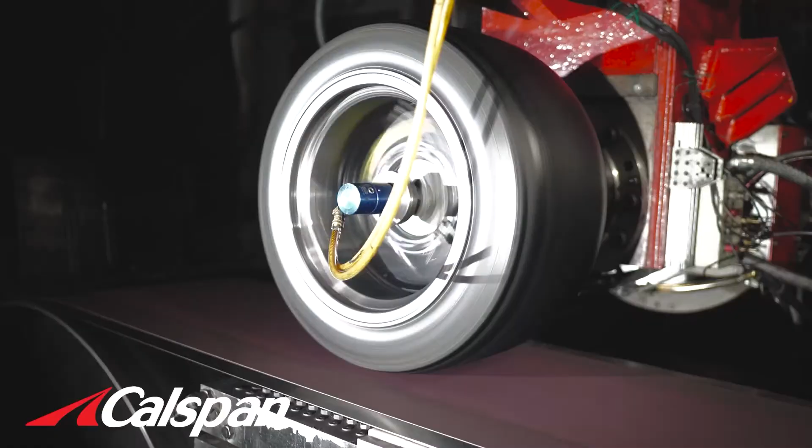So, our agenda for this talk is, first of all, an introduction of me, my background, and some of the areas I've worked in both engineering and the virtual world. Definition on how the virtual world has changed over the years. Virtual world in motorsports, a little bit about my beginning there, specifically in motorsports.

A little bit of a case study that we wanted to give to you today regarding the growth of engineering in NASCAR, how we went from no engineering in place to where we are today with the pretty firm use of the virtual world. The importance of virtual world in motorsports. Why is it so important to engineering? Why does it mean so much to the engineers in motorsports?

The advent of the simulator and the virtual world in motorsports. Again, the newest technology, and how are we applying it? Why is it important? And then finally, the future of the virtual world in motorsports, and then some closing remarks and some credits.

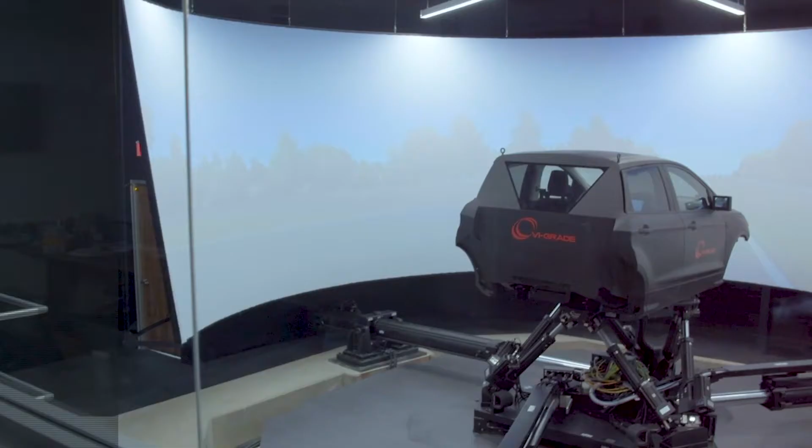So over the course of my career, I've had the fortune to develop and deploy various forms of engineering tools, simulation methods, and virtual environments, and have witnessed tremendous change over those years. Seems like whatever position I held, my focus was always on the use of computers and the virtual world to solve real-world tire vehicle system problems and to advance the role of the engineering process.

Whether it was in supporting tire designers in my early years, creating custom tire vehicle simulation software, or developing tools and methods in support of either OEM or motorsports programs, I was fortunate to witness and participate in the growth of the role of engineering and the virtual world.

While all these programs have been exciting and challenging, there's been none more fulfilling to me than all of the work in motorsports. I had the pleasure of working with an extremely talented group of engineers that were focused on making significant contributions to the success of their race teams, as well as the art of engineering in this extremely stressful and fast-paced environment. At its core, this motorsports engineering problem is the quintessential engineering problem.

It might surprise you to hear me say that after all those years of motorsports, after all those years of enjoying what I was doing, there were times where I felt like engineer was a swear word. Let me explain what I mean.

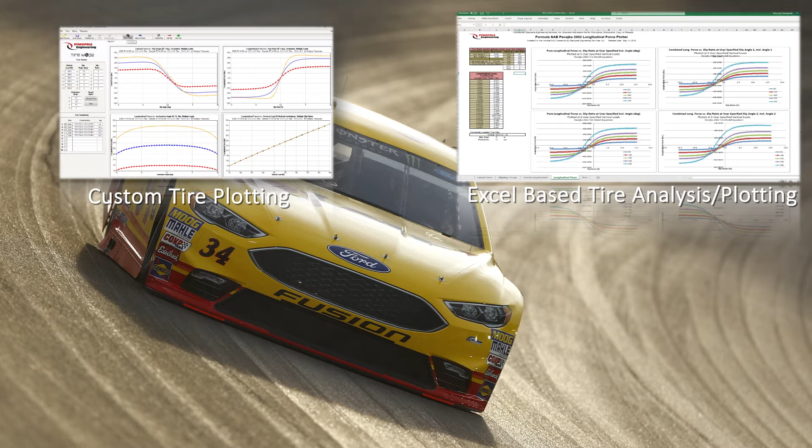While these were crude compared to today's standards, they were invaluable back then because they gave engineers access to information and analysis methods they didn't have prior to that. These tools included MATLAB and Excel-based tire data analysis and plotting programs, simple kinematics processes, basic steady-state vehicle dynamics calculations. At the time, these tools and methods gave engineers access to information not available before and gave them the ability to start formulating a base understanding of tire and vehicle performance. It's also allowed them to start investigating a lot of the what-ifs that engineers are known to ask.

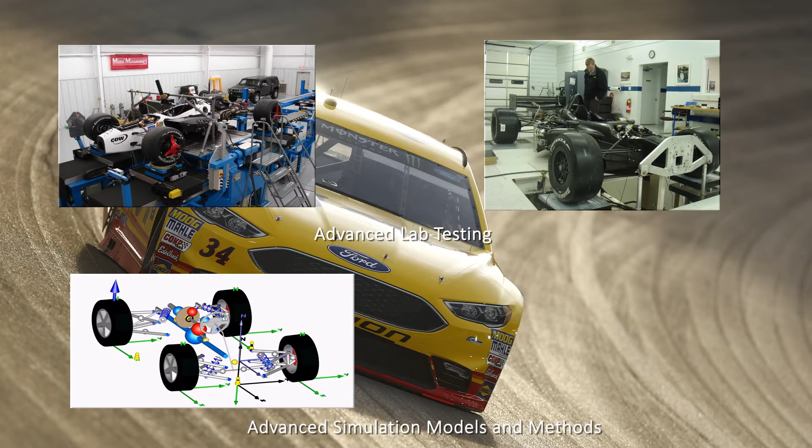As time progressed, in typical engineering fashion, we started asking more questions, demanding more detailed data, started developing more detailed processes and created more advanced models and tried to deploy more useful tools. The status quo was never good enough, especially in racing. Because of this drive, focus shifted from simple analysis methods and lab testing to advanced analysis and engineering tools, advanced lab tests, dynamic simulation methods, and eventually to the virtual environment we're all familiar with today, namely the driver-in-the-loop simulator. I will be discussing most of these forms of the virtual world as part of this talk today.

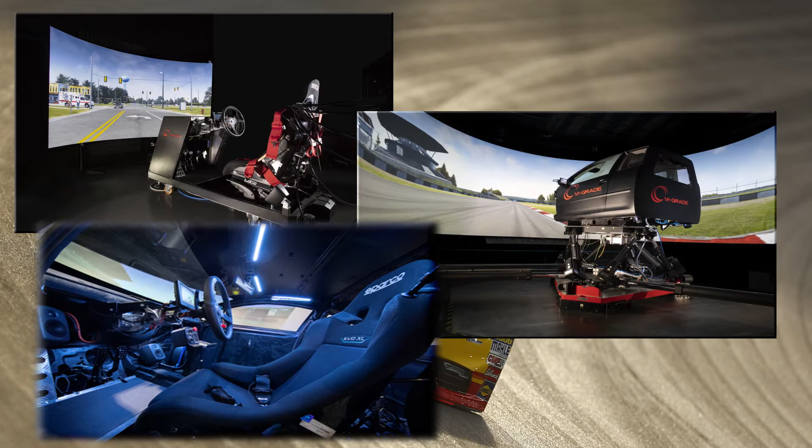So with this variable definition of the virtual world in mind, I want to take some time to circle back to my time in the advanced engineering group at Goodyear Racing in the mid-1990s. During that time, Goodyear was heavily involved in Formula One, and I was tasked with developing the tire models and the simulation methods necessary to support not only the team requests for information, but also the race tire design process.

And while engineers and the engineering methods were a norm within the Formula One ranks, they had built up large organizations that seemingly had limitless budgets. That level of detail and that level of capability and resources were not yet available in the tire manufacturing world. So while race teams pushed us for all of this information relevant to the tires, we were only in the early stages of developing the testing methods and the simulation methods required to support not only their requests, but also the tire designer's requests and the tire design process.

As I noted, my initial charter was to take a lot of the OEM tools we had developed and port them over into the race tire development process, and to try and come up with engineering metrics that would help our race tire designers and their process, as well as help us all understand the interaction of the vehicle on tire performance. We wanted to find ways not only to understand the operating conditions that the tires saw, but also find ways to try and incorporate or understand the driver comments and driver feedback and try and equate them back to some calculable vehicle dynamics metric.

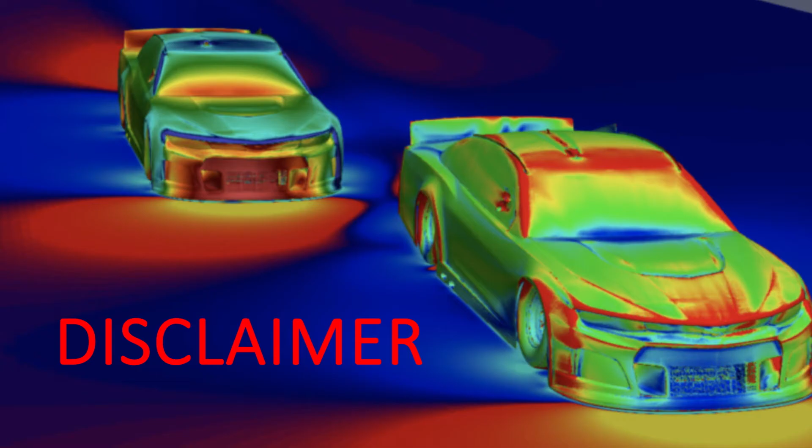Let me expand upon that and provide some background. Before we go further, I want to emphasize that this is in no way, shape, or form a critique of NASCAR or anybody involved in the sport. It's merely being used as an example. Note that all forms of motorsports have been through this exact same evolution over time—some just got started a little earlier.

As I stated before, I started my career in NASCAR in the mid-1990s, and I put together this engineering and virtual world time continuum for NASCAR to illustrate the typical growth path from a world of no engineering to a world of full use of engineering, simulation technology, and the virtual world.

So the first block of time I want to talk about is the early 1980s through about 1990. During this period, there was no engineering at all as part of the process, and there were no tools available, whether physical or virtual, to support chassis development or race weekend preparation and setup optimization.

Most decisions were made by an extremely talented, experience-based crew chief who had amassed a collection of notebooks of data and real-world test and race information about the car. These books and data were used not only to prep the car for the race weekend, but also to adjust the car during the race weekend. These crew chiefs essentially had 100% control over how the car was built, assembled, and raced.

At this point in the NASCAR timeline, a great number of suspension parts being utilized were still production OEM parts that were being 'adapted' for use in racing. But these guys were really good at what they did. They knew their car, they knew how to adjust it, they knew how to interpret driver comments, they could take visual cues from the car on the racetrack, they would look at lap times and make adjustments just based on their experience and the data books available to them.

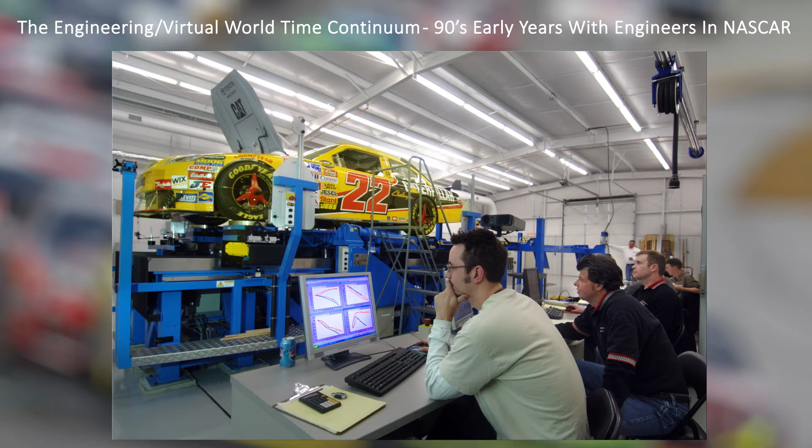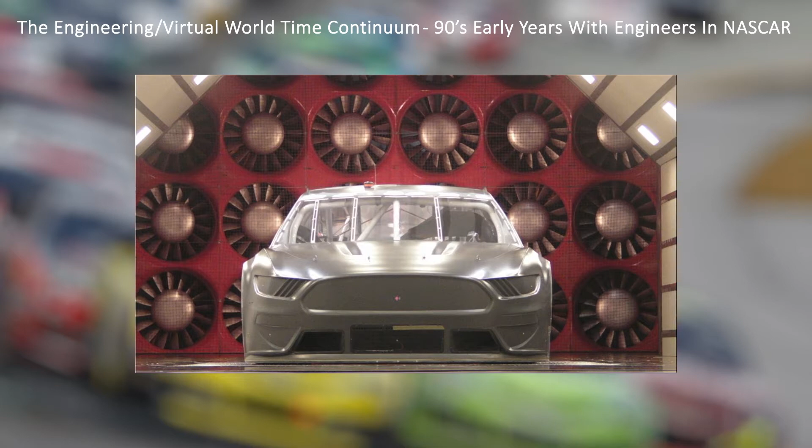So during this time, the easiest inroad for technology and for the engineers in NASCAR was the application and understanding of aerodynamics information through the use of wind tunnels. This tool offered a bit of instant gratification for the traditional decision makers, where application of concept designs as well as the QA process were easily measured, quantifiable, and able to be validated at the racetrack.

At this point in time, there was very little known about tires other than the experience-based knowledge teams had amassed through the years. One of the first impacts we seem to have had on the sport was when we started to provide some pretty basic tire information to the teams via Excel spreadsheets with general plot creation capabilities. By providing that to the teams, we were able to leverage some vehicle information back from them as we started to develop our internal process.

NASCAR is a place where the great equalizer is the fact that everyone has to run the exact same four tires. The teams making the best use of information about those tires to improve speed and manage degradation through a race were typically the ones who were successful. So having knowledge at whatever level was seen as a large advantage.

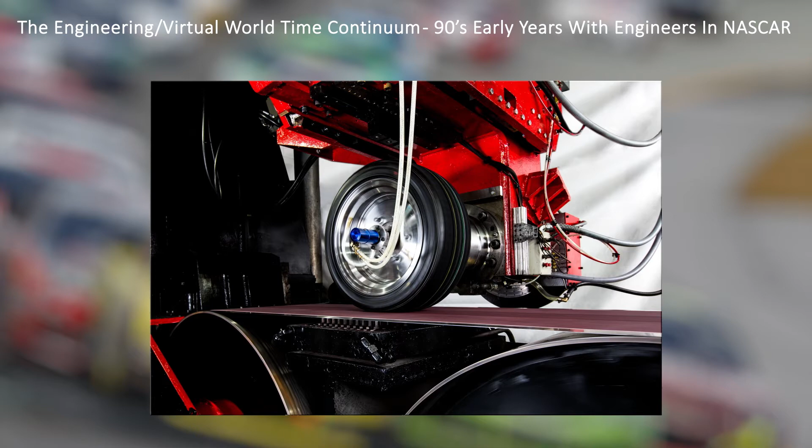In terms of tire information, teams really only wanted to know about optimum pressure, and every once in a while wanted to know about the optimum toe and camber settings, or the preferred alignment for the tires in service. Now that tire data was starting to become more readily available, teams started to focus their efforts on the operating environment of the car and the tires on the racetrack, trying to make better use of the tire data being provided to them.

At this time, tire models were being developed to support tire data analysis methods, not really for any kind of simulation analysis. Engineers merely wanted to know what the best hot and cold pressure was, what the best inclination angle was, and what kind of toe they needed to run in order to make best use of the tires and develop their optimal performance during the race.

Note that the more data we provided, the more questions they asked, the more detailed information they wanted, and this would go on. This was really the prime motivator for me to start Stackpole Engineering Services, to support this growing interest in tires, tire modeling, and tire data.

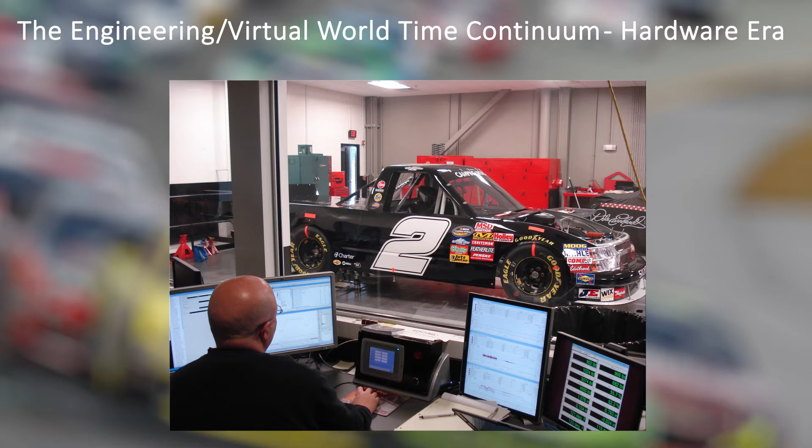So now we're in the era of 2000 to 2007, which I've titled the era of the hardware solution. This was the beginning of more comprehensive lab-based tests, such as pull-down rigs, 4 and 7 post, and now 8 post rigs, and the expansion of infrastructure required to support this lab-based testing. These rigs were being installed at team facilities or OEM centers to support a better understanding of the race car and the ability to evaluate prototype parts and vehicle setups.

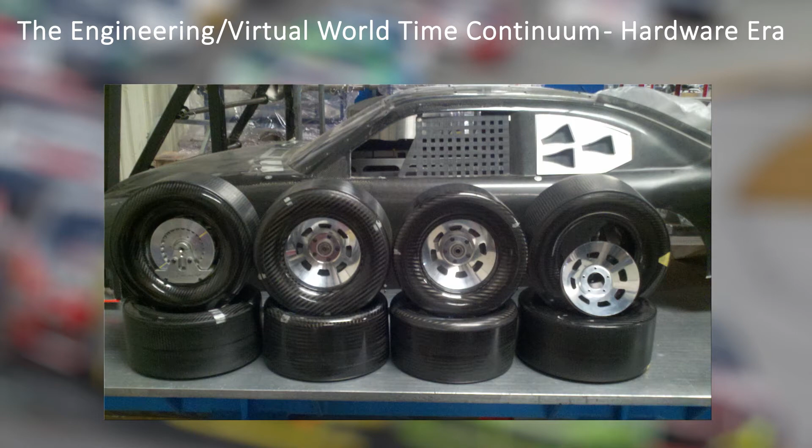As is typical in my experience, engineers developed some pretty specific techniques to extract the most out of this testing data. This also allowed engineers to investigate designs and setup changes on the race car without ever having to go to the racetrack. While this was a very effective method to understand their race cars, the process typically required physical cars, physical parts needed to be manufactured, and very lengthy test sessions—in fact, a lot of times lasting for days, sometimes with varying results.

While this testing allowed engineers to evaluate changes, they didn't always equate to improvements on the racetrack, and didn't always equate to changes the driver would even notice. Regardless, teams and manufacturers continued to press forward, gaining experience with the testing methodologies and working towards making these methods part of their mainstream design and optimization process.

At this point, engineers and crew chiefs within NASCAR started to develop a better understanding amongst themselves of the why and the how behind how these cars worked. But this is just now another collection of information within this silo of technical data. So now they're going to the racetrack with briefcases that not only contain the historical data they'd previously amassed over the years, but now technical information such as wind tunnel data, gear ratio charts, engine dynamometer data, vehicle performance data, kinematics curves, shock dynamometer data, and the list goes on. And all this data had to now be stitched together basically with experience and intuition.

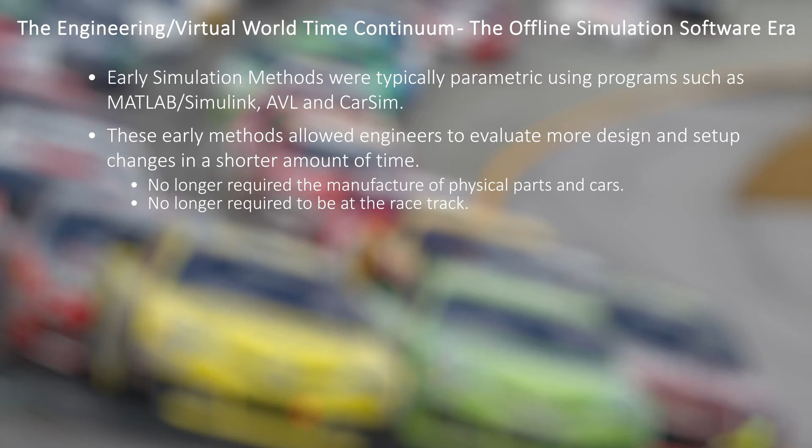Engineers being engineers, they're always searching for a better, more accurate way to evaluate performance using these virtual methods, always searching for better models and better methods to represent the performance of their race car at the racetrack. We then started to get into dynamic simulation methods, either parametric or multi-body physics based. They were kind of the next step forward, both for handling and for ride performance. We used tools such as CarSim, Adams, and more recently, Dymola.

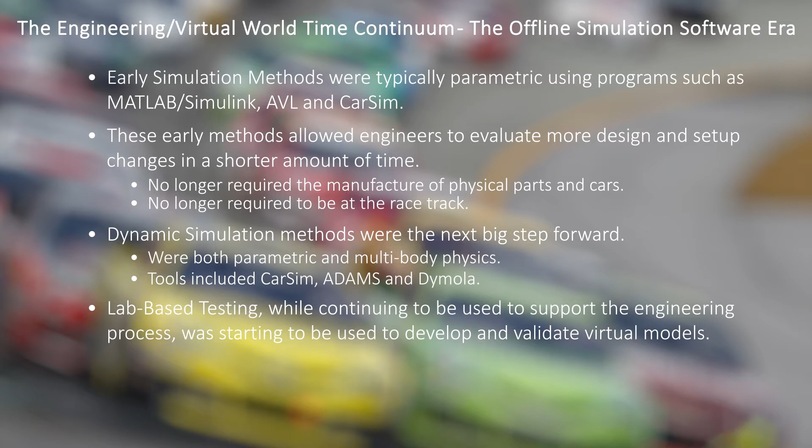These lab-based tests, while continuing to be used to support the engineering design process, were starting to be used now to help develop and validate the models we were building. These methods and lab-based tests are still being used today to support our development and validation process. This was also the time where simulators were starting to get talked about, but they wouldn't really come into fruition until a little later on.

That brings us to 2010, kind of to where we are today, and I call this the virtual era, virtual solution, where now we're using offline sims and DIL tool sets. Around 2010, simulators began to make their way into the conversation, and manufacturers looked at ways to bring this technology, already being deployed in the OEM market space, into motorsports.

Probably worthy to note at this point that engineers had really become a part of the NASCAR process, to the point where the OEMs were now asking and using motorsports to develop technologies that could be integrated back into the production environment. The team environment within NASCAR provided much shorter time to market opportunities and didn't really have the inertia that a lot of the OEM processes had. Advanced tire models, driver models, DIL and HIL test rigs, and applications of CFD technologies.

These were all being developed within NASCAR or motorsports space and being then pushed back to the production environment. Looking at this simple timeline, it's pretty clear that it took several decades for the engineering process to really mature in NASCAR. But as with all motorsports series, NASCAR has focused itself on now utilizing this virtual world environment to support the engineering process through a combination of offline simulation methods and the use of simulators.

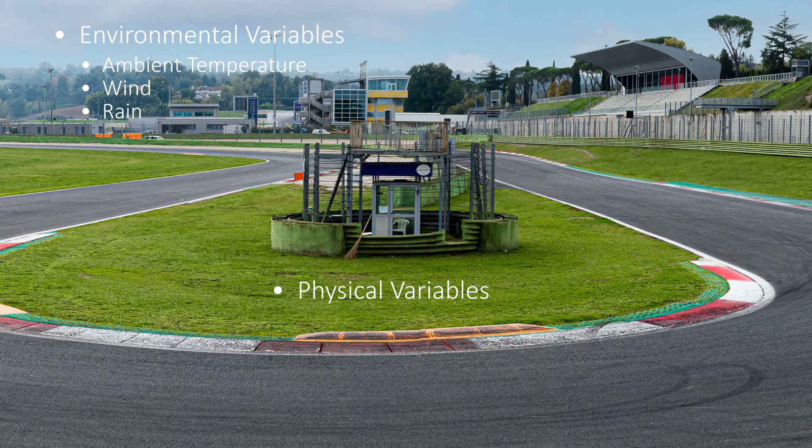One of the biggest challenges we encounter in motorsports is the variables associated with on-track testing and how to extract good data through those changing conditions. These include variables such as environmental, whether it be ambient temperature, wind, unfortunately sometimes rain, physical variables such as track temperature, tire wear, tire give up, set-to-set variation, and sometimes control variables such as varying driver lines, throttle brake changes, and the subjective feedback that we then have to process and equate to engineering metrics.

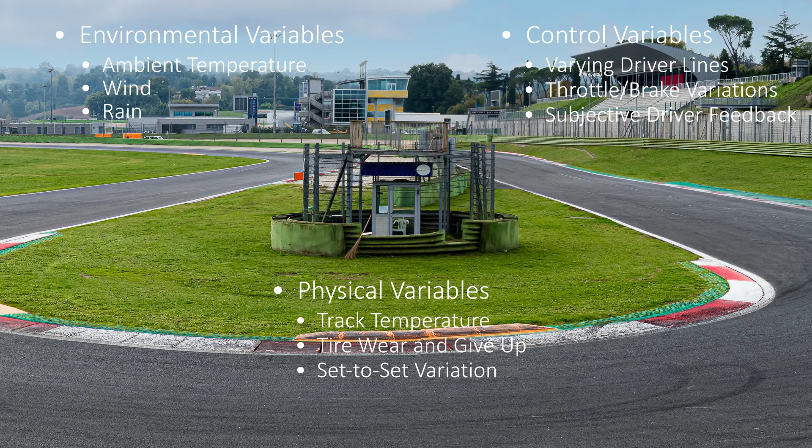We go to the racetrack with the expectation of perfecting setups, body and suspension designs, and optimizing tire performance. But we are continuously fighting variables. And over the years, engineers have developed creative ways to manage these variables, but they're always present and oftentimes cloud our decisions and make data difficult to interpret.

As we discussed, engineering tools, both simplified and advanced, were developed to provide engineers with the capabilities to understand their race cars, to support the design and race preparation at the shop, and to optimize the race cars when they're at the racetrack at a moment's notice. DOE and AI methods have been developed to help analyze an infinite number of options without ever having to build a physical part or have to go to the racetrack.

Engineering groups have grown up from one individual performing basic record-keeping tasks to teams of engineers analyzing every aspect of their race car and developing relevant simulations, models, and methods to more accurately represent and understand their race car. OEMs have stepped up by providing engineering resources from everything from custom engineering tool development to at-track support, and many of them have often opened full-service technical centers. In addition, teams have created their own departments now responsible for advanced engineering methods and tools.

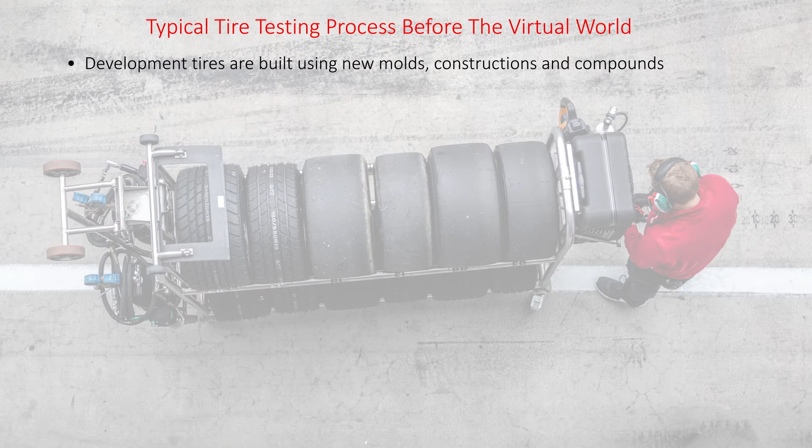An example of this might be seen in the way that tire manufacturers oftentimes test or conduct tire tests for selecting a new construction, a new mold shape, or a new compound. Tires are built, a track is reserved for a number of days, teams from each manufacturer are invited to participate, and the test starts. Each team is typically given a series of tires to evaluate, and by the end of the test, the direction on acceptance is primarily driven by driver comments. And seldom, unfortunately, do these drivers agree with each other, and you're often left wondering what the correct direction is.

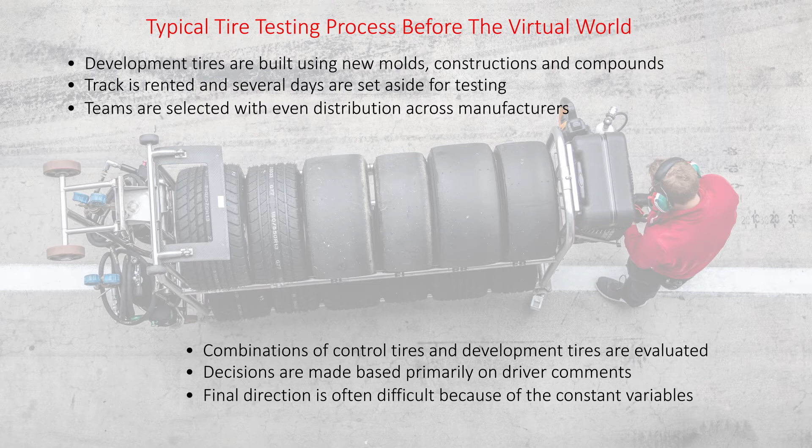And all this is complicated by weather, differences in car setups, track conditions, and teams who oftentimes want to be there to help optimize their own race car and not necessarily focus on the tire testing going on. Oftentimes when you're said and done, it's a guessing game as to what the right answer is.

So there had to be another way to design, test, and quantify outside of the standard methods of lab testing, simulation analysis, and on-track testing. And this method should help engineers not only evaluate an infinite number of design and setup optimizations in a controlled environment, but also allow the driver to participate in the process and find ways to equate their subjective comments to some base engineering metrics.

So the answer came by way of various forms of a simulator. This technology became the next big improvement in the tools that support the engineering process in motorsports. And man, what a valuable tool it has become. Simulators opened up a whole new world of possibilities in the search for optimum performance and provided an infinite possibility to understand and improve the vehicle.

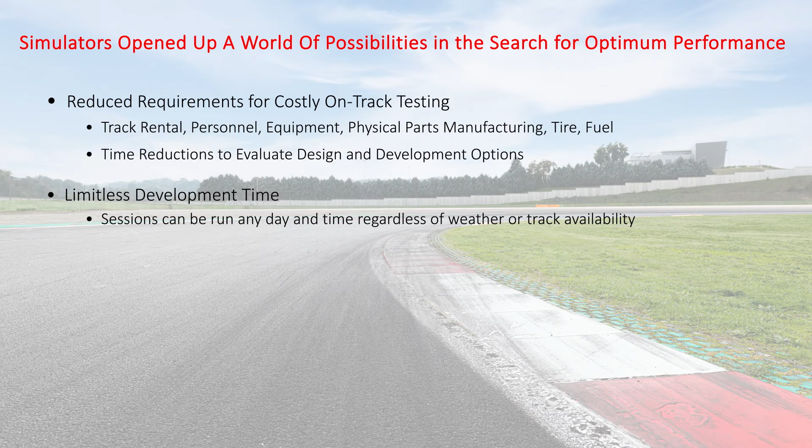Simulators also had limitless development time. Sessions could be run on any day, regardless of weather or track availability. Sessions did not have to count against the team's availability of on-track budget, and more laps could be run without the worry of changes to the car, changes to tires, changes in track, environment, all those things.

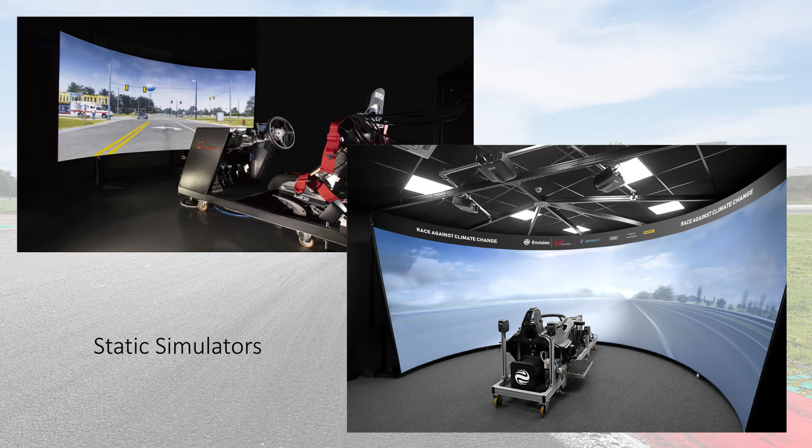Simulator variants also offer the ability for both race engineers and drivers to evaluate designs and setups. The static simulator could be used to try out or evaluate physics and system updates prior to evaluating them in the dynamic simulator with a professional driver. Once updates are evaluated and approved, they could then be ported over to the DIL for driver evaluation.

Next, the ability to control significant variables that would typically occur at the racetrack, and that might include weather, changing track conditions, issues with repeatability. All those things are now controlled within the simulator environment.

Next, the ability for the engineer to evaluate new parts, new designs, and new setup theories without the need to manufacture or purchase any physical parts. The ability to include the driver's subjective feedback and have the driver be part of this virtual environment. This was probably the first time we were able to have driver comments be part of the engineering process, which significantly improved the results of the evaluation.

And finally, the ability to evaluate new racetracks and give drivers experience and time behind the wheel at tracks that they might not have ever driven at before. And also with the changes in rules and the reduction in on-track testing, having the ability to conduct virtual testing is a significant benefit. Now, of course, there was roadblocks and hurdles that stood in the way of a successful implementation of the DIL in motorsports.

Perhaps the biggest initial roadblock was drivers and owners' acceptance. There's several occasions that I witnessed where drivers and the owners pushed back pretty hard on use of the simulator, all while the manufacturers were excited about the possibilities. Many of the team owners and the drivers were concerned that it was just another glorified video game that could never be useful in the engineering process.

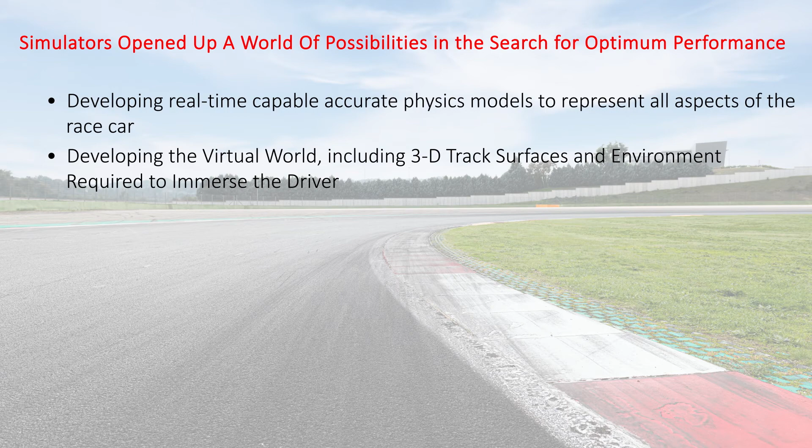Then there was the engineering challenges, such as developing real-time accurate physics models to represent all the aspects of the race car, developing the virtual world, including the 3D track surface and environment required to immerse the driver in the virtual reality world, developing a motion platform and additional capabilities to allow the driver to feel the performance of the race car as they would on the racetrack, developing all the additional environment capabilities such as cockpits, braking systems with feedback, shifting and transmission, sound.

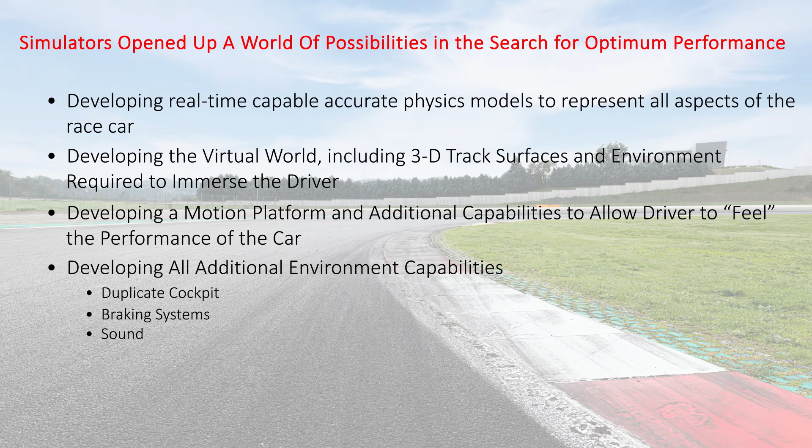All these inputs are required to ensure the driver feels like they are in the actual race car. And then developing the infrastructure to support the creation of the required inputs and the methods used to ensure that the inputs work properly in the simulator. And we're talking about details such as tires, aerodynamics, engines, steering systems, drivetrains.

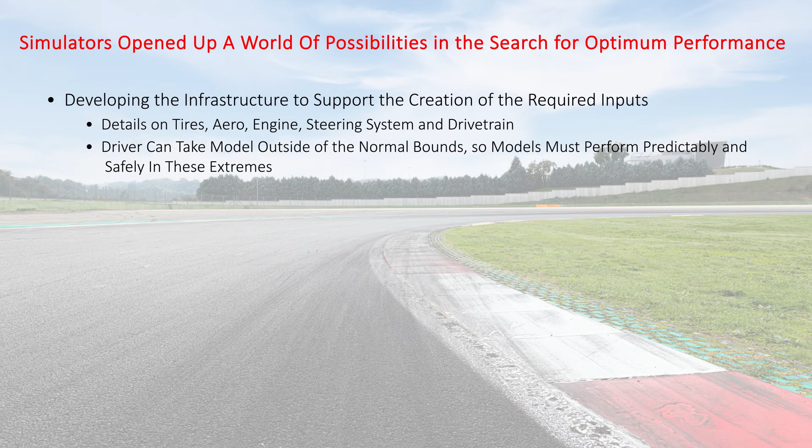These all had to be at a higher level than those required for the offline simulation. And because drivers can take physics models outside the typical operating ranges of an offline simulation, the models must perform predictably and safely in these extremes.

Over time, as the models and the environment matured, the owners, the engineers, and most importantly, the drivers became much more confident in the simulator, and its use became invaluable. The simulator became part of a three-pronged tool set in the arsenal of tools engineers would use and heavily rely on.

As part of their design and race preparation process, that includes the offline simulation, where this software tool is used to evaluate and prepare options for the race weekend, and then at the racetrack to support at-track performance adjustments during the race weekend. Secondly, the simulator is used to evaluate design and setup optimizations with the driver in the loop. And then finally, at-track testing.

At-track testing will never go away, and it'll always be part of the development process. And it really does serve as a great and valuable confirmation and validation to all the work performed in the virtual world.

Stackpole Engineering Services has been blessed and honored not only to enjoy a front row seat to the changes and advancements of the engineering process in motorsports, but also been blessed to be part of its growth.

I'm still amazed at the changes that have taken place over the course of my career and humbled by the possibilities looking forward. As I look back at the 30+ years I've been involved in this field, I can't help but marvel at the accomplishments and the advancements that were made, the quality of the tools and methods that were developed, where we are today compared to where we even thought we would be back then, and where it looks like we're heading in the future.

We started out on a quest for basic information about the tires and simple tool sets that were needed to help answer some questions that tire manufacturers and teams were asking. That has matured into a highly detail-oriented and comprehensive virtual environment where advanced testing, model physics, and simulation methods are the norm. But as always, engineers in motorsports are never satisfied with the status quo.

We're always looking for the next big thing that'll give us a competitive advantage or a way to get another hundredth of a second out of the race car.

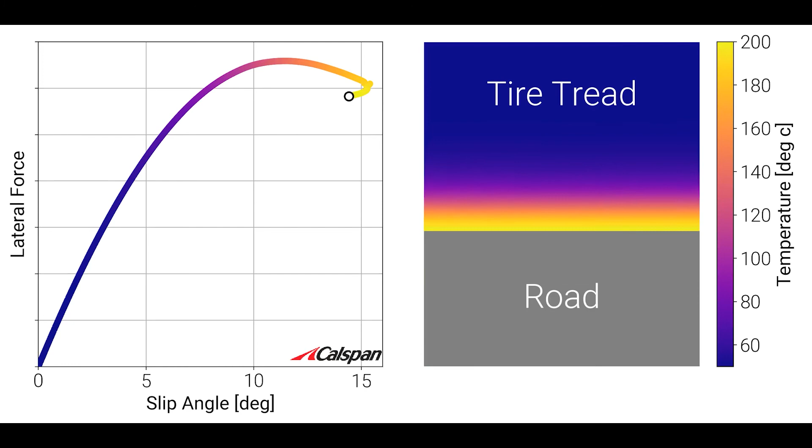I'm confident this search, as we look forward, will include advanced tire models that account for thermal effects on inflation pressure change, physical changes to the tire, and overall grip capabilities, wear effects on grip, pressure change, and thermal performance, and material property changes and how they change over the course of an outing, and finally improvements in runtime speed. We're also looking at advanced tire testing methods to support a lot of these advanced models.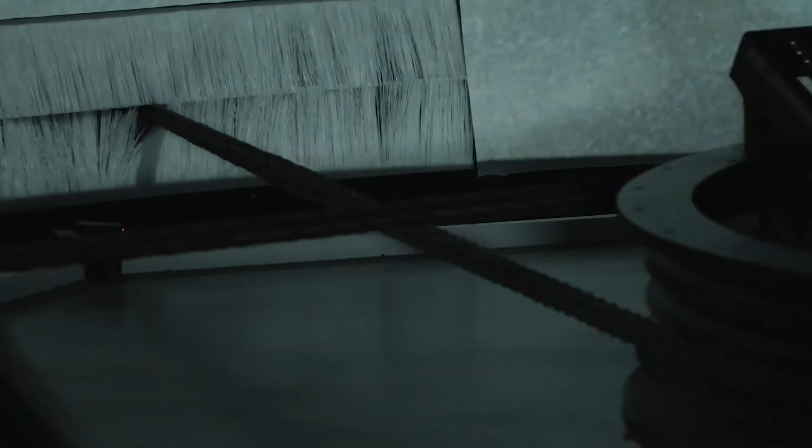Advanced vehicle model physics, whether it be for offline simulations or now for simulators. And finally, advancements in simulator technology itself, whether that be improved driver immersion, sound improvements, environmental modeling improvements, or improved driver control and feedback, whether that be improved braking systems, improved steering systems.

In addition, Stackpole Engineering has been honored this year to support the Indy Autonomous Challenge, which is the world's first head-to-head, high-speed autonomous race at the Indianapolis Motor Speedway. The challenge is a collaboration between private, public, and academic institutions around the globe to challenge students to develop an autonomous Indy Lights race car and compete against each other at the famed racetrack.

While this challenge is academic in nature, it does give a glimpse into potential changes in motorsports in the years to come. And I have to wonder if maybe motorsports might look like this in the future.

Who knows? Wherever we wind up, I'm confident that engineers, engineering tools, simulation models, and the virtual world will play a key role. Over the course of my career, engineering in motorsports has gone from a swear word to an integral part of the success of any motorsports program.